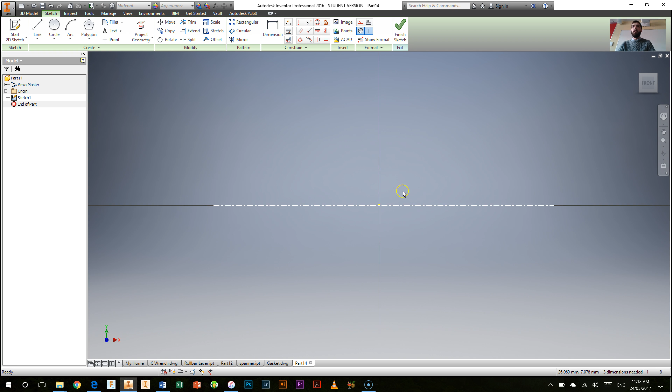So we'll go and start a new line. I'm going to select this button here in my format palette, which tells me that it's a center line, and that allows me to create different dimensions around the center line. So we'll click on that center line. I'm just going to pick a point way off to the side here and go out this way. So there's the start of my line there. I don't know how long it is either side of my y-axis, but we've got a line now. We'll just put a quick dimension on that, because right now it's not constrained or dimensioned, and we're going to make it 150 millimeters. There we go. We'll just zoom out so we can see the whole thing. Probably the next thing we need to do is position it and make sure it doesn't move from the position it's currently in.

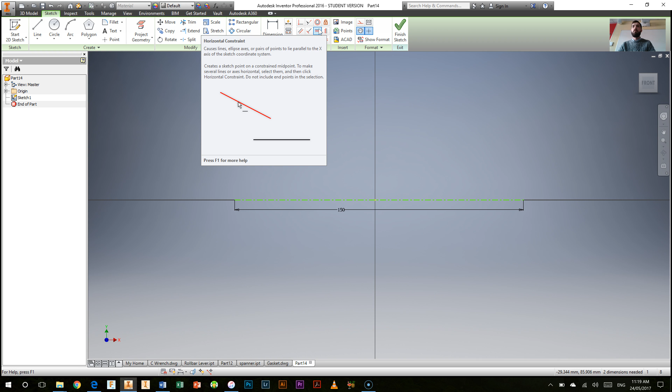So I could do two different things. I could fix it using the fix one here, which probably isn't too bad an idea, or I could use something like the horizontal constraint, which will constrain it to a specific point. Even more, I could use the coincident constraint. Let's use the coincident this time. So I'll select the line and I'll select the center point. Now that line cannot move from that center point. If I try and move it, you can see all I can do is go left and right.

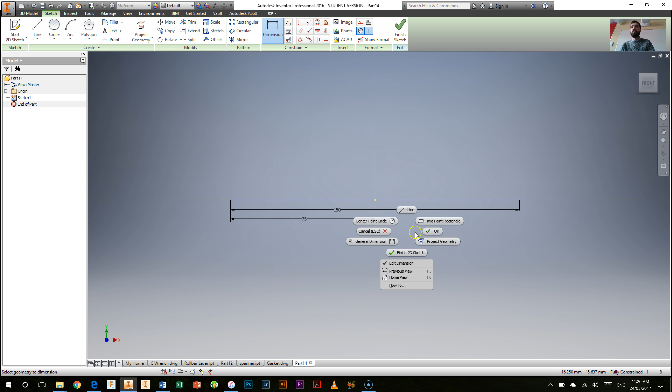At this point we probably do need to constrain it just a little bit more so we know that it's not going to move around too much. To do that final little constraint there, let's give it a dimension from the center point to one end of our line like that. We'll just pull that down this side and we'll make it 74. Well, let's make it 75. That way it sits right in the middle there. Okay, so there's our center line.

Now, as I said, we want to start putting in these circles. So we've got one circle at the top here, which is 190 millimeters between centers, which means we divide that by 2. So 190 divided by 2 is going to be 95. So 95 millimeters up from our center point. So I'm just going to zoom out a little bit and move it down my page here. And let's go ahead and pop that circle in.

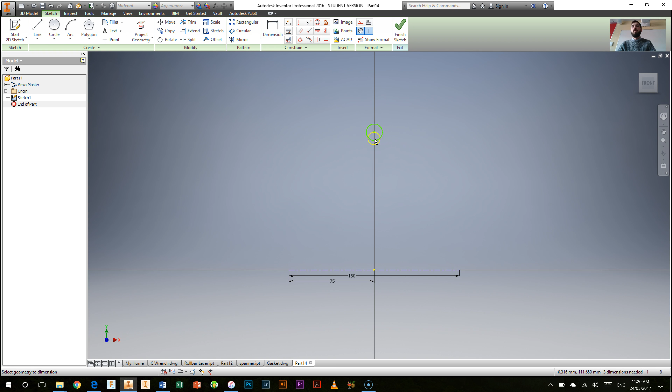So clicking on the circle tool, I'm going to select the y-axis there and make a circle to start with. Now I'm going to dimension it to 16 millimeters. Right, now I need to give it a dimension from that center point. As I said, that's going to be 95 millimeters there, from there to there. We'll make that 95. Okay, and probably the last thing we need to do is set it so that it doesn't move off the axis, because that's the last dimension this particular circle needs. So I'm going to use the vertical constraint in this case and constrain it like that.

Alright, next one on our drawing is our 70 millimeter diameter circle, which happens to be 85 millimeters between centers, so we'll divide 85 by 2, and that gets us 42.5 millimeters from our center line up to the center of this circle. So let's go ahead and put that one in now. So again, circle tool, I'm just going to make any sort of circle shape on that y-axis like that. Doesn't have to be perfect as far as dimensions yet.

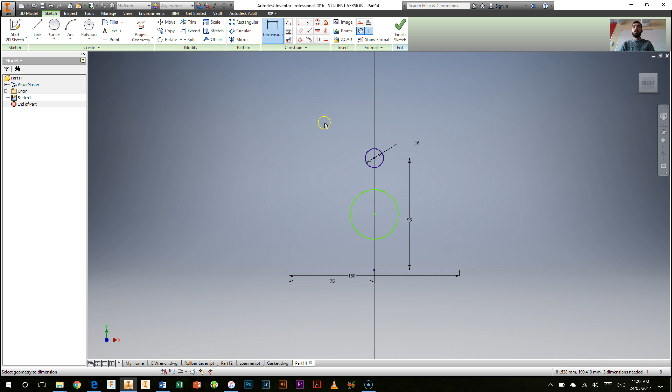We'll click our dimension tool, give it a diameter of 70 millimeters. The last thing we need to do is set it at 42.5 millimeters from that axis. 42.5. Alright, and one more thing, we'll just set it so that it is aligned with our center point and cannot move. So again, we're fully constrained again.

As you can see, the reason I'm adding in these dimensions as I go is because I'm going to end up with a lot of different things on this sketch. It's much easier at this point for me to start giving different parts that I'm adding in dimensions or constraints as I go, because it's keeping my drawing fully constrained the whole time. Alright, let's go back to our drawing quickly.

I've got two more arcs here which happen to be 90 millimeters apart between their centers. So for these holes here, we're going to do half of these holes, because we're mirroring about that center line, we only want half. So we've got one there, and they continue to be 16 millimeters in diameter. So 90 divided by 2 is 45 millimeters. That's how far we're going to have to come out from our center point here. Alright, so let's add in our first one.

We're going to go to our arc tools, and we're going to select the center point arc. I'm just going to get it on that axis line there, our center line. I'm not particularly concerned about the dimensions at this point. I'm just adding in those two arcs. I can fix this up in a minute. So to start with, we're going to use the equal tool to give them their dimension of 16 millimeters in diameter. By doing this back to our original circle there, we ensure that they're all absolutely identical. Okay, so that's the first dimension on them.

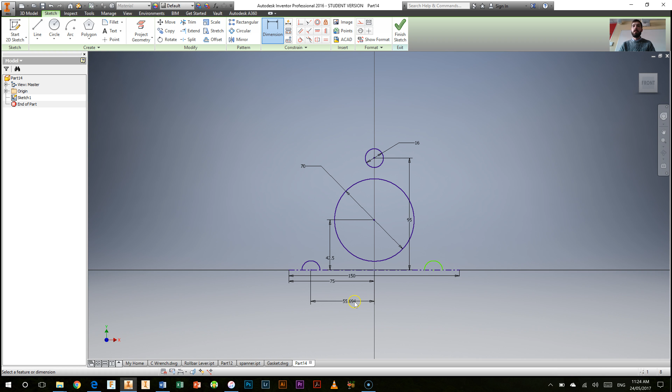Okay, so now we've got our arc set up, all our holes, and our major hole in the middle there. Now we're up to the point where we need to start putting in the wavy line around the outside. Now the best way to do this one is in stages. So we're going to start off with this top arc up here.

Okay? This will end up connecting to another one just here, which I haven't actually popped the dimension on for you. I'll just do that now. And dimension, and we'll add that one in. It doesn't want to let me. There we go. 24 millimeters. Oops, that's not what I wanted. Radius of... Okay, so 24 millimeters in here.

So 24 up the top, 24 in this little curve here, 50 millimeters for this curve. Then we have an inner curve here, which we need to dimension as well, and it's actually shown on this side as 28 millimeters, and then 28 millimeters for this part here. So let's start with the 24 at the top. This one here, we can see the center point is going to be the same as this circle.

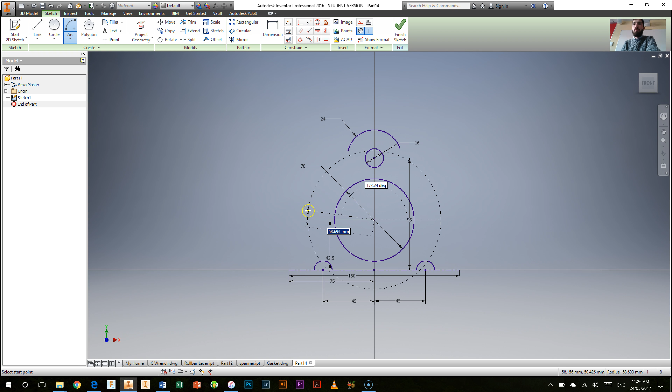Right, now I reckon we'll go and add in the left and the right 50 millimeter arc here and here. Back to our drawing. Using the arc tool, not the circle tool. We're going to select the center of this circle, so if we look at the original drawing, it shows that as the center point. And we're going to come out from there, probably about to there, for each of these. We'll just make a small arc on either side. Again, doesn't matter if they're perfect at this point, we'll fix that up in a sec. And we're going to pop a dimension on one of those as 50 millimeters.

Okay, and what you may have noticed is when I drew those two arcs, this one automatically had an equal constraint put on it. So if I click on it now with the show constraint tool, it's got an equal constraint there to the other side's arc. Now, I've got a little arc down the bottom here again, which is 28 millimeters on each side, so we'll go and add that one in now as well.

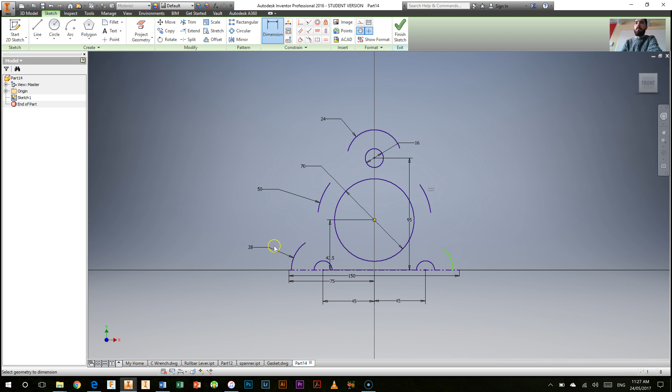That arc is centered at the center point of these holes here, so I'm pretty close to my 28 mil there, so I'll just pop that one in there, and I'll do another one here. All right, we'll give them some dimensions and some constraints now, so make this one 28, and I'll use the equal constraint tool to make the other the same. There we go, so both of them are now equal. They're not entirely constrained right now, so if we grab lines, they can move around. So we're going to have to add some more lines in and dimension those as well.

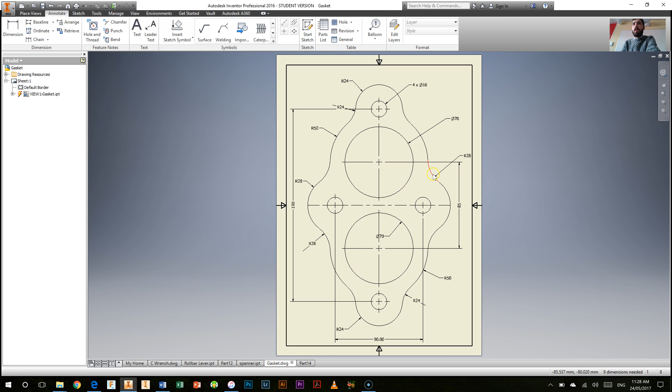Right, so going back to our gasket drawing, got a couple of little arcs in between our 28 millimeter here and our 50 millimeter here, and they are 28 millimeters in radius, so those two there. Now to do these two arcs, I'm going to change tools to the 3-point arc tool. I'm going to select the ends of both of those lines and pop an arc in like that. Doesn't need to be a specific dimension yet, we'll add that in a minute. Okay, so that's my two there.

Now I'm going to go ahead and click the tangent. Before I put dimensions on, I'm going to tangent those two lines together. Alright, and you can see one of them didn't join together there, but we'll fix that up in a minute. Alright, that one already exists, so we're all good there. So we've got our tangent constraints in, now we'll add some dimensions. So that one at the moment is 21. We're going to change that to 28.

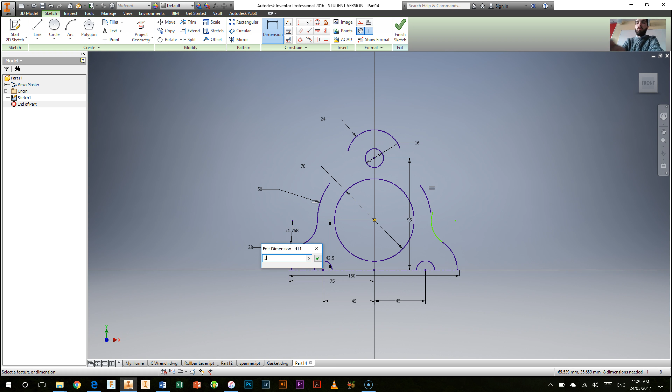Alright, and as you can see here, I've got a point here where this arc, while it is tangent to this one, it's way too long. So we're going to go ahead and we'll add a coincident constraint in between these two lines. And we'll probably need to add one to the two endpoints of the lines. There we are. Now they are fully attached together and they're fully dimensioned.

At the moment, you can see that I do have 5 dimensions needed still, and this may disappear once I put in these last 2 curves. We'll see what happens. So adding in our next arc. So endpoint, endpoint, arc, endpoint, endpoint, arc. And we'll go ahead and pop some tangent constraints on there. So between there and there and there and there. Same up here.

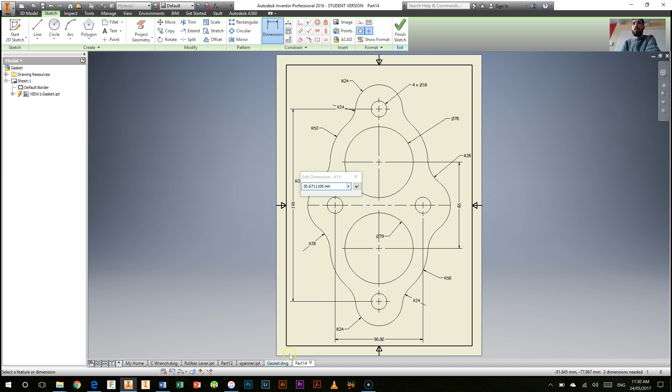And there we go. So now we pop those arcs in now. They are still green, so we do need to add a little bit more dimension on them. So using our dimension tool, and let's just check what they are on the drawing. 24 millimeters in radius, these are the arcs here. So 24 millimeters, equal constraint for the other side. And we're almost constrained here.

It is showing that I still have 1 dimension needed. So let's see if we can find where that is. Basically, we're looking to see if any of the parts that we've just added in move at all. So far, so good. Nothing's shifting yet. Unfortunately, you can see I'm getting a lot of my constraints right now. There we go, it's saying fully constrained now. So we are fully constrained, must have missed something there. And we have half of our gasket.

Now the next part is really easy. What we're going to use is in the modify toolbox up here, in the pattern palette, the mirror tool. So we're going to select that tool. Now what it allows us to do is select the things that we wish to mirror and then the line we wish to mirror them around. So we're going to go ahead and start selecting it. For this I'm just going to use the big bounding box like that, and that picks up pretty much everything apart from that arc there, that one there, that one there, and that one there. Now our mirror line is of course our center line there. Once we've got that all selected, we click apply.

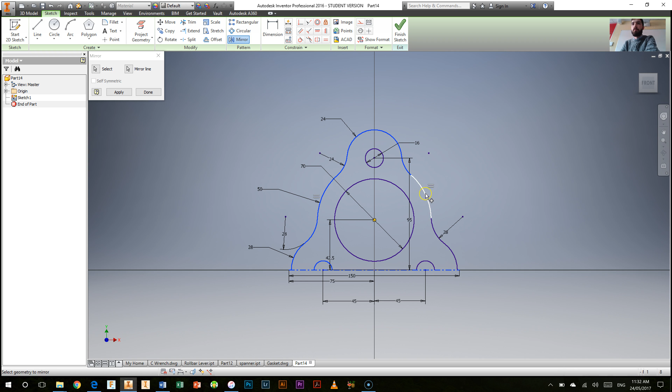Oops. Let's try that one more time. Mirror line is that one, and all our parts that we're going for. I'm just going to click them individually now. Make sure I've only got those bits that I need. Okay, apply. There we go. So it's gone and flipped that around the mirror line. When I'm finished, I'll click done. And clicking the front button here. There we go, we've got our gasket there.

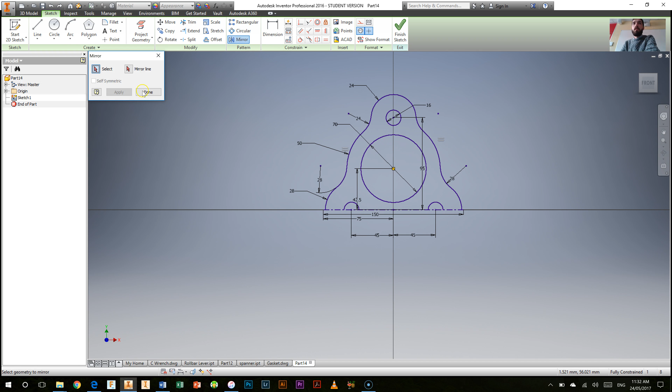Oh, I must have missed my top circle there. So let's just undo that. We'll do it one more time. So selecting all that information again. That one there, that one there, that one there. And our mirror line. Hit apply. There must be something going on with this circle perhaps.

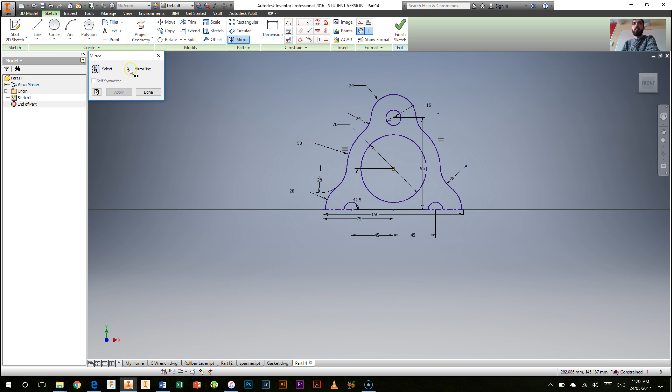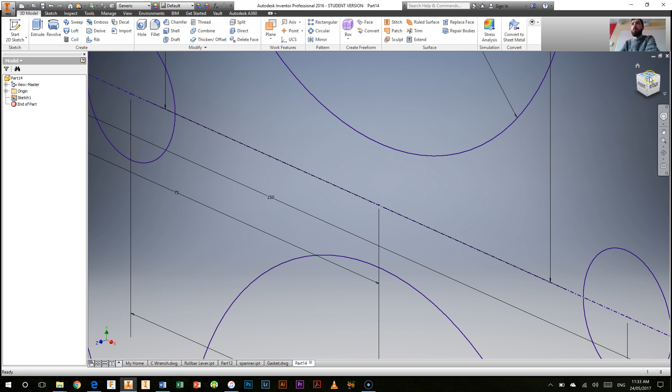Okay, so we've got that one to flip and we've mirrored around that center line and it's all correct now. We can see down here, because we've mirrored absolutely everything, including all our constraints, the sketch is fully constrained. So that one's all done now. Hit finish sketch and we're just going to zoom back out. And the one last task I'd like you to do on this particular sketch is an extrusion. So we're going to use the extrude tool up here.

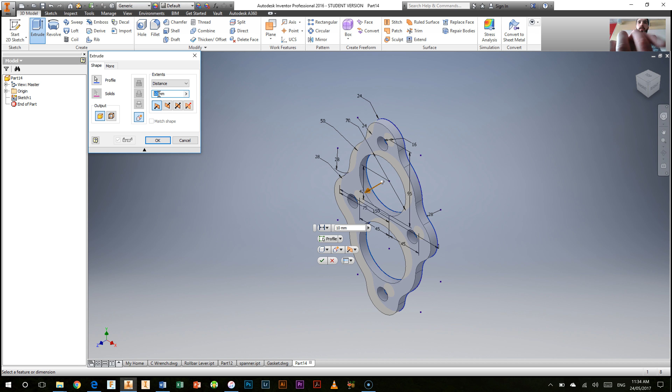And you can see if I click this little drop down, it gives me all the information about how this tool works. So first we've got to select the profile we wish to extrude, which is that section there and the bottom section as well. Now we need to give it how far we wish to extrude it. So in this case we're going to pick 1mm. Gaskets tend to be quite thin. Underneath that you can see we can extent differently. So we can type in specific dimensions, or we can do it between two different areas of a sketch or between two different sketches, that sort of thing as well.

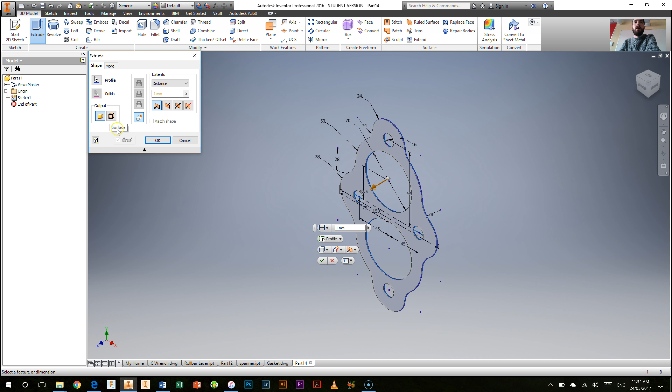Once we've done that, we can select the direction we wish it to extrude. So we can extrude backwards or forwards. We can also extrude symmetrically or asymmetrically. So asymmetrically we might go 1mm backwards and 2mm forwards. Symmetrically we'll be doing the same distance either side. Alright, we're making a solid out of it, as we can see there, rather than a surface. And we've got it all selected, it's ready to go. We'll hit OK, and there we go, we have our gasket.

So that's the gasket. I'll get you guys to save that one off to your folder and pop that one in our submissions folder. Thanks very much for watching.